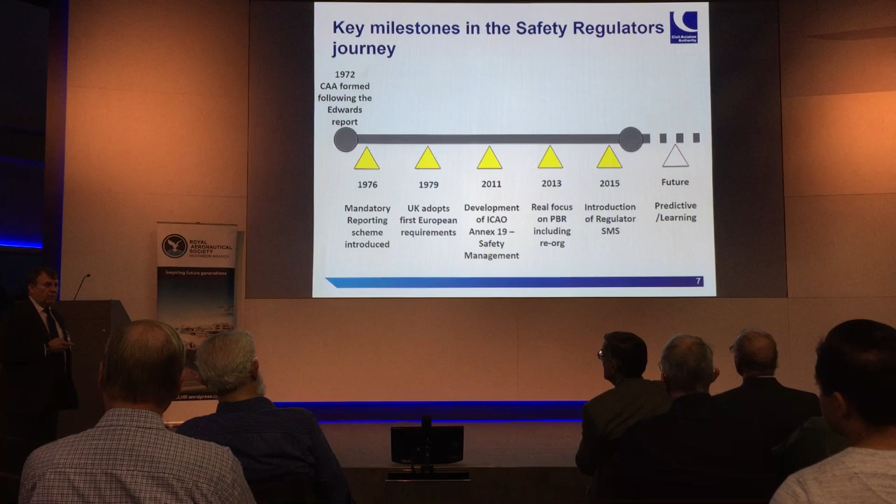Okay, and now we're into trying to predict where risks will be. The key word you'll hear all the way through this is learning, because that, for me, is the key. It's the key from where we've been, and it's the key to where we're going.

Just to describe a little bit of what we cover: if you fly a plane, if you have a plane, if you operate a plane, if you operate an airport or go through airspace, or you're the pilot themselves, we will oversee you. We require you to enter our system and to be assessed and validated to do that task. There's quite a wide range of activity that we do.

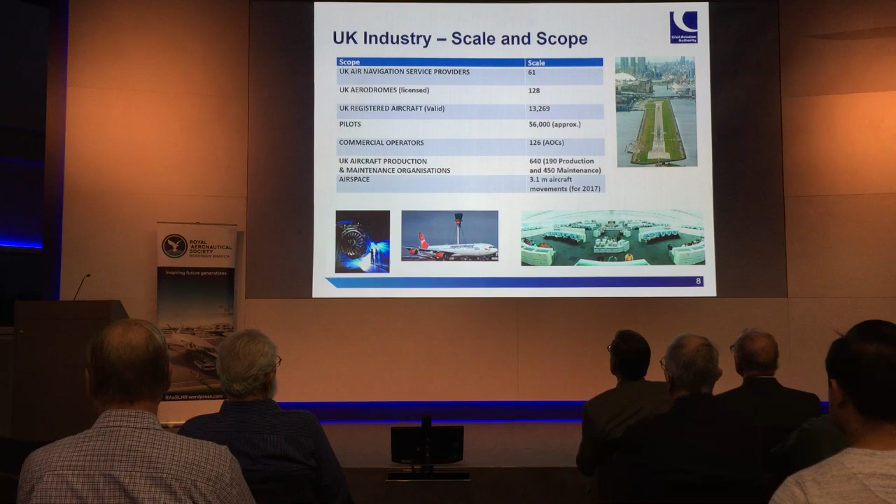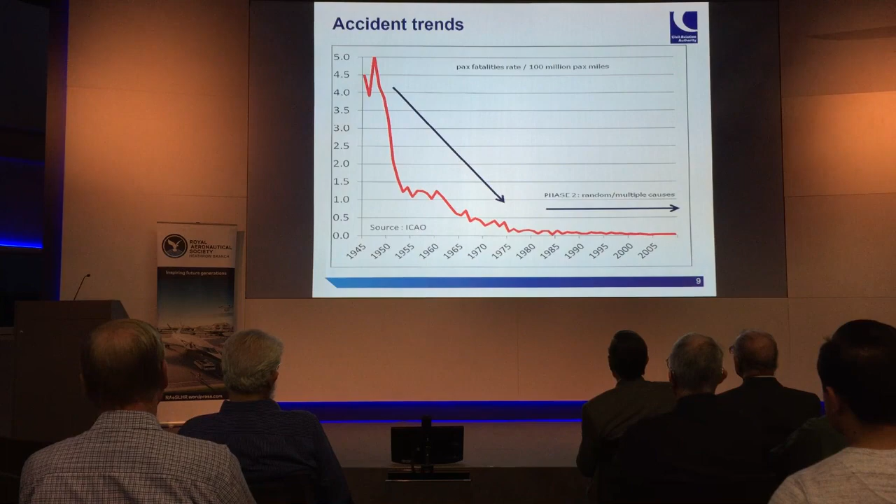So what I'd like to talk to you about now is how many fatalities do you think we had on commercial air transport last year? Anyone have a guess? Zero. Zero, correct.

Now just to compare that with other forms of transport — I was talking to somebody earlier about a nervousness they have about flying, but when you compare it against some of these other forms of transport, the surprise one in there is walking, as far as I'm concerned. So you're better off on a plane than you are walking. It just puts it in perspective, and again, that doesn't happen by accident.

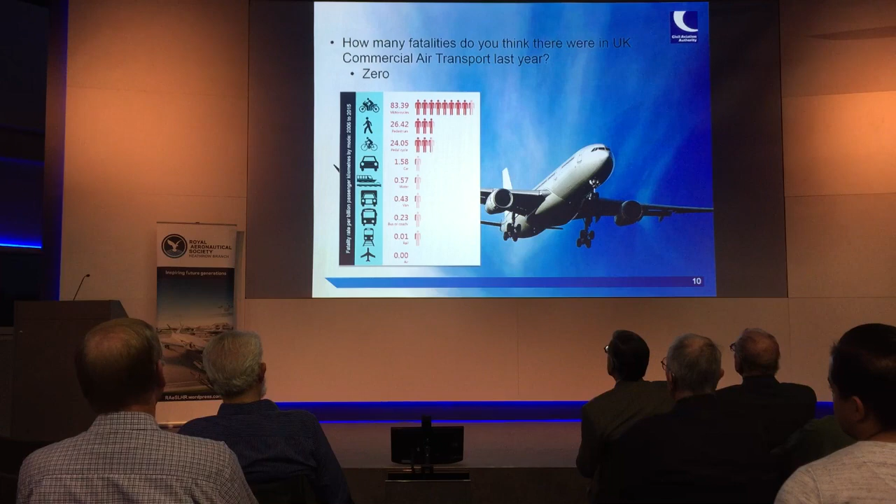So here's my view of what I think makes us safe. How did we get to that 50-fold improvement in safety? There are three themes here: the individual human and their aircraft, the industry, and the overarching system. And there are 10 factors driving safety.

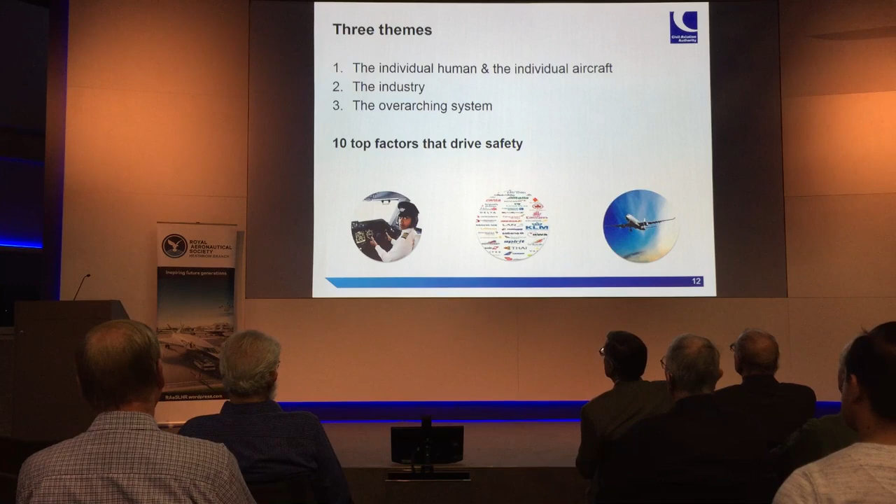Number one, competency. We have requirements that pilots, engineers, air traffic controllers all have to be trained, and that training has to be approved. They have to go through simulations, they're continuously assessed through continuation training, they have to pass exams, and they have to be licensed for any new variants of aircraft or equipment they're working on. So quite a high level of standard the human has to meet to be part of this aviation system.

And unlike, for example, the building trade that I mentioned earlier with Grenfell, there is an intrinsic involvement of the individuals flying that plane or working in the cabin. It's in their interest to report issues, to alert their company and the Civil Aviation Authority of issues they have, and they don't hold back, which is great, because then we get to understand emerging trends.

And they're not afraid to challenge each other and say, well, why are you doing that? We had an example quite a few years ago, the Überlingen head-on mid-air collision, where if there had been a bit of challenging and teamwork, that may never have happened.

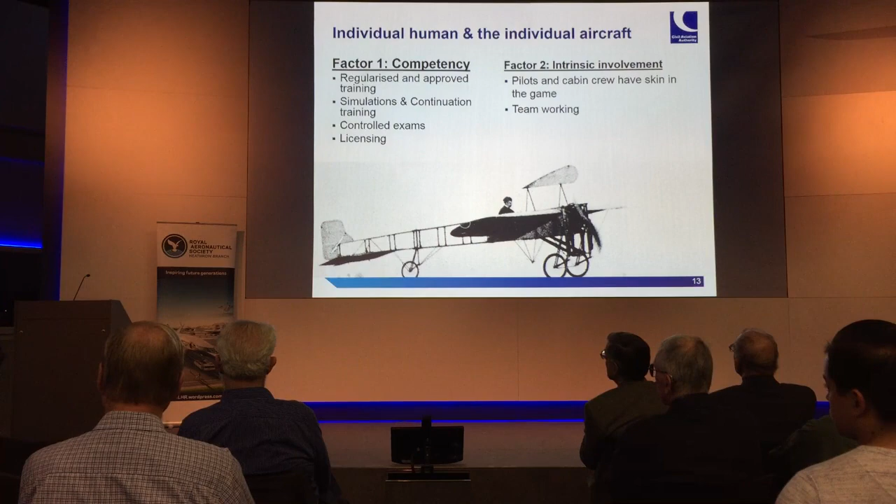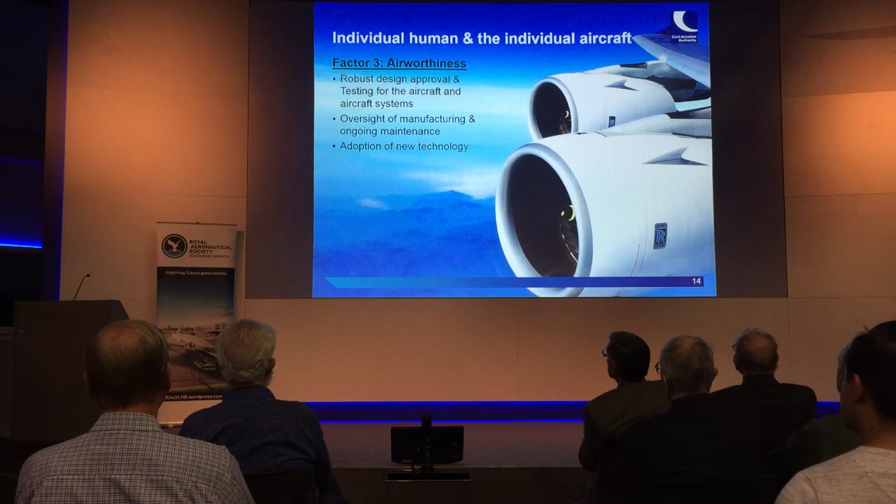Third factor is airworthiness. The aircraft and the systems on that aircraft have to go through robust testing and approval, similar to humans, before they're allowed to fly. We have ongoing oversight of the manufacturing and maintenance of that equipment. And what's great is that equipment adopts the latest and newest technology, so there's a lot of advancements you see on these aircraft in use. Sometimes it's us holding that back because we haven't seen enough safety assurance associated with it.

Our fourth one is about just culture, and I mentioned this earlier. It's about the safety reporting we've got in place. A lot of this is mandatory, but there are also some areas that are voluntary, so people report on other things too. We get above 30,000 reports a year - last year it was about 32,000 - where people are concerned about something. Not to say there's a major issue, but it helps us understand where our attention needs to be.

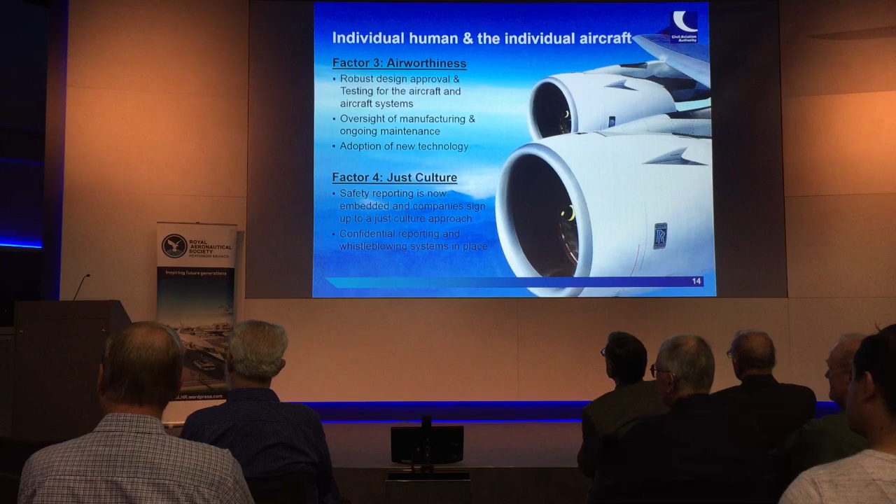Also, we have a confidential reporting or whistleblowing process. Obviously things have gone wrong if that's needed, because we encourage companies to have their internal reporting and for them to learn. But if everything goes wrong, or they don't feel they're being listened to, they can report to us, and then we will confidentially and sensitively investigate that. Sometimes we have to be really clever about how we do that, because we don't want it going back to that individual. So we do it as if we're just here to do an audit and look at a few things, then we home in on what's been reported.

As a result of all this reporting, we have a whole load of data, and the industry also has a hunger for data. The amount of data downloaded from each aircraft on a daily basis is huge - beyond my understanding. But when you think it's nearly 33,000 reported occurrences last year, we're monitoring and analysing that for potentially new safety issues. That feeds back into our regulatory safety management system that I mentioned earlier, because that's potentially a new risk we have found there.

The whole idea about this is that we're finding problems before they've gone serious. So that's our aim in life - that we're actually preventing accidents or incidents from happening.

So then we move on to the industry itself - that's a key factor. The aviation industry is growing hugely. If you see the graphs of expansion, I've got one a bit later on, it's growing at a huge rate. And the safety standards have to match that, because with current rates, the accident rate would be unacceptable to the public and to the aviation world in general. So we have to make sure we're continuously improving and learning from all the information we've got to drive those safety improvements into the system.

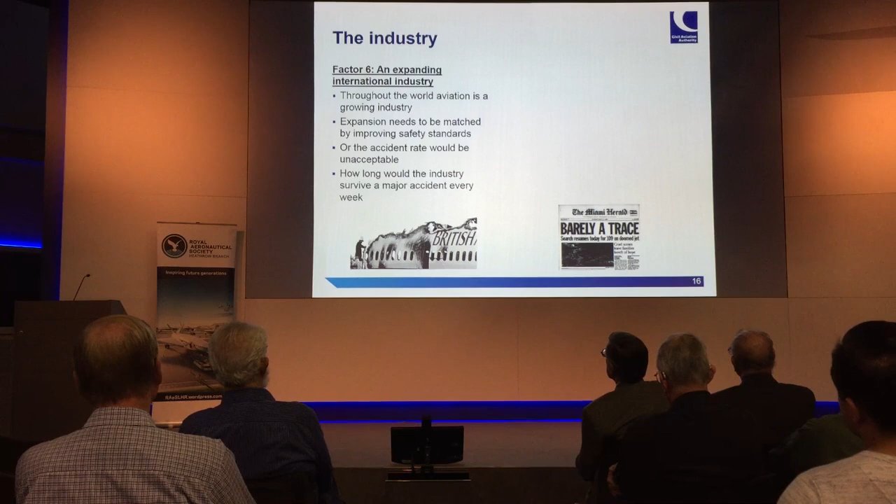Because it wouldn't take long for confidence to be lost if there was a major accident every week. And there is a real positive link between business and safety, because companies don't last long if they have major accidents. So it's in their interest, and it is their business, to be as safe as possible.

I've entered into conversations many times about whether we would publish safety data about a particular company. Actually, the safety levels of these companies are so high, they don't even get approval unless they are so high. So when we're talking about 99% safety, there's no point publishing that data. What we want is for them to be learning and improving continuously, because if we said one was safer than another, it wouldn't drive the right behaviours. What we're trying to do is get them to report all the time and act on what they find.

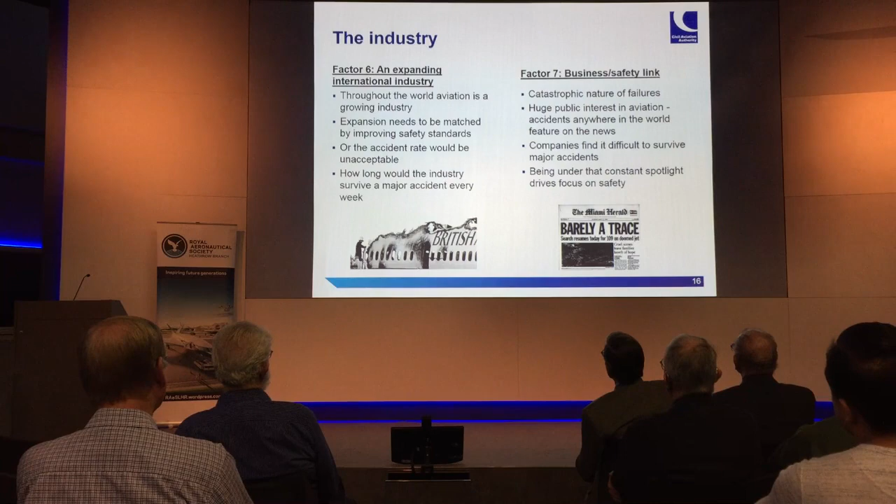So we are lucky that we do have a global system. We have the ICAO regulations, and within Europe we have the EASA regulations.

That drives consistency across the patch. Within EASA, they do standardization audits of different countries, involving various countries auditing another country. We have them continuously, and it just makes sure that standards are being maintained and forces that any inconsistency in the system is ruled out.

Also, it encourages that driving of the safety culture, assuring what you're doing is correct.

We have a robust investigation process. We have an independent investigation branch within the UK, and most countries have them. It's the AAIB, the Air Accidents Investigation Branch, that investigates an accident if it does happen and provides an independent assessment that feeds back into the industry and to us.

That's really valuable, and our connections with that, because they do some learning all the time that we want to learn, and because we can act quicker than their reports, so we can feed that back into the system quickly.

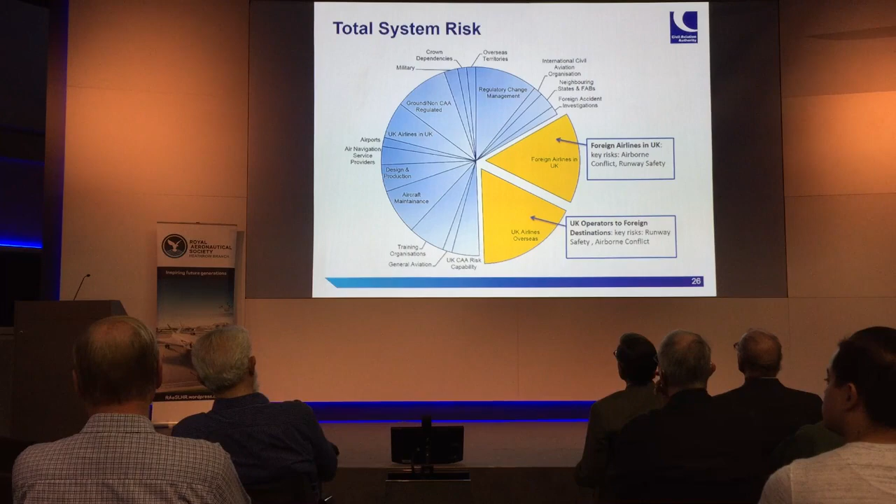We call that influencing outside of our control. So even though it's not necessarily in our remit, because we're focused on the UK consumer, it drives us into that area.

This is quite a hot topic for us at the moment. You've probably heard about big data and big data programs - we have one of those. We have around 30,000 occurrence reports every year, and you can imagine how many years we've been doing this. That's a lot of data, and we want full access to it. We want to be able to interrogate it and look for trends before they turn into a more serious incident.

So we're looking to technology to help us do this. We've got a program pulling together all the data sources we have, and we're going to be looking at machine learning and artificial intelligence to help us find any potential issues in there. That's quite an exciting program - it's been going now for over 7 months, and we expect to see the first results towards the end of the year.

Also, the leadership role - we've realised from the work we've done on safety culture that individuals within the company can be absolute role models in safety culture. So we want to recognise and understand, even within our own people, what good looks like, and try to drive behaviours associated with what good looks like.